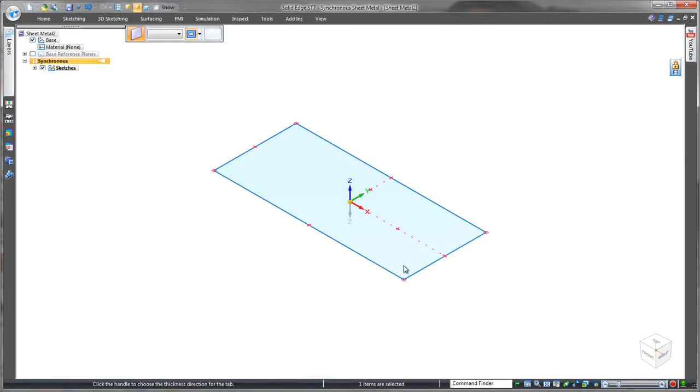Starting from a blank space, we'll sketch a rectangle roughly the size we want and pull that into a sheet metal gauge. For a couple of flanges at either end, we can simply pull these out too. Let's do the same thing again to add a couple more flanges.

And all the time, watch how we're working with our geometry rather than clicking through commands. Design is the focus here, not the software.

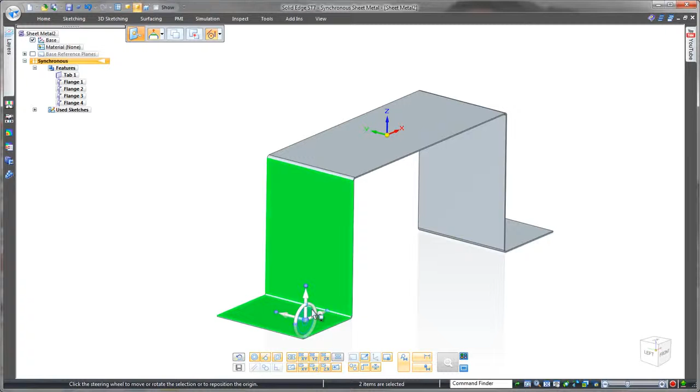Oh, and the design here should be for these flanges to angle out. No need for delete or undo. We can use what we call the steering wheel, our main control in synchronous technology, to angle. But not both sides, I don't think. No problem, we'll just tell these faces to be at right angles.

Just because we created these symmetrically doesn't mean there's history-based design intent tying us down, like you get in most any other CAD system. Easy.

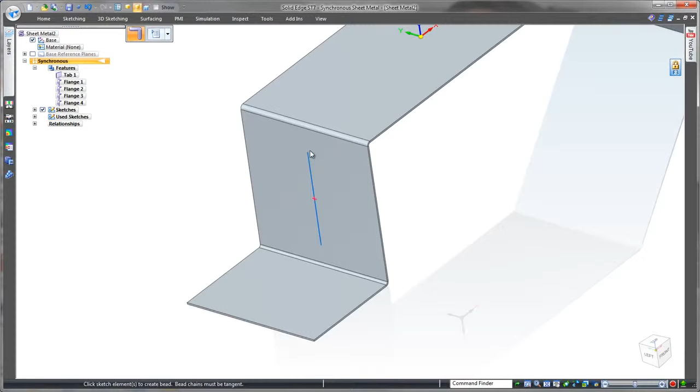Okay, next up we need a guide for the USB block that this spring clip will hold. A bead would be ideal, and that's as easy as sketching a line where we want it to be, and then choose the size and shape of our bead. This one I used in a previous project should work just fine.

Next, let's create a cutout to go through all three sections of the sheet metal on the right hand side. Oh, and check out this method as an even quicker way of sketching shapes.

Nice. We'll centre that up, and although this is a concept, I do know this needs to be 12mm in width, so we'll tie that down.

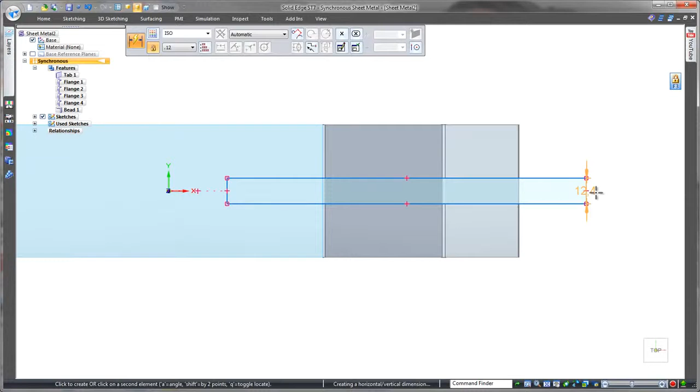Another simple drag, this time to remove material, but we want this cut to be created before the part is bent into shape. No problem, Solid Edge can flatten the part on the fly before cutting.

Very nice. For the retaining clip that we need, let's drag out a couple of flanges here and angle them both in. Same process as before, pull to create, and then the steering wheel to angle.

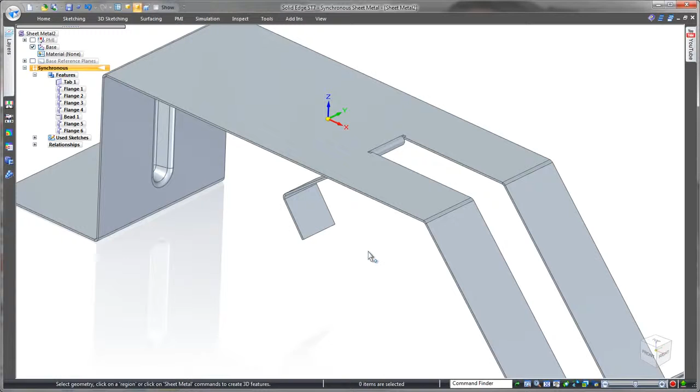We also need a sidewall to contain the connector block, so let's add another flange. But the material needs to be on the inside and a partial flange, not a full. Great!

Along with the USB block, this spring clip needs to clamp a fuse holder. We'll pull out another partial flange, and then let's mirror this across to the other side.

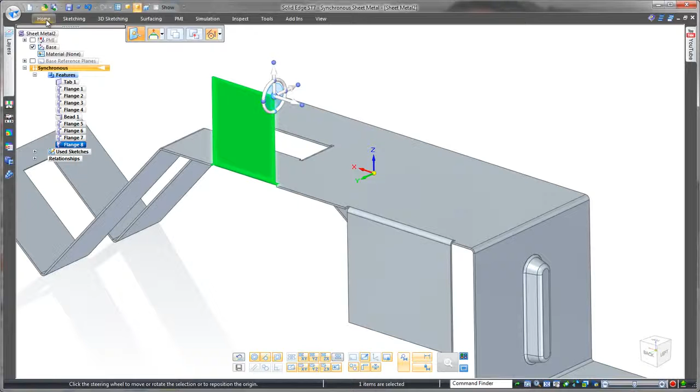Oh no, we've made a big mistake. The design brief clearly stated that this top sheet metal piece needs to be angled. I completely forgot. Remember that this was the first piece of geometry that we created.

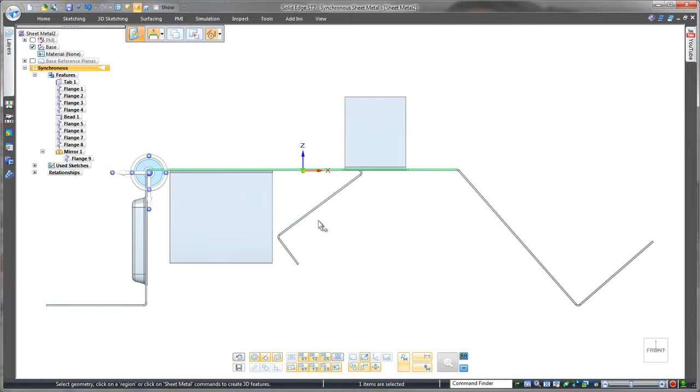Everything else is built on this. But also remember we're using Solid Edge with synchronous technology. Check this out. Steering wheel to the rescue, simple rotate, no drama.

Let's get back to working on the clamp for the fuse holder. Remember we mirrored this, and notice along with everything else, this has been added to a feature tree. Yes, it's direct modelling, but there are still features to work with, like in history-based CAD. The best of both worlds with synchronous technology.

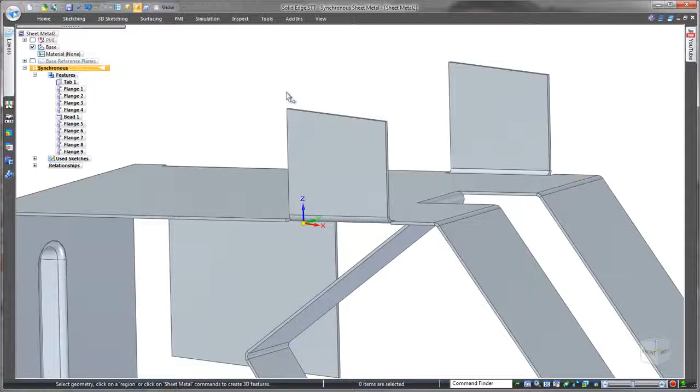That means we can edit the feature, breaking the link so that we can work independently on one side. And now we can add the jog that we want on this flange. Same process as the bead here, just a simple sketch line, and then apply the jog.

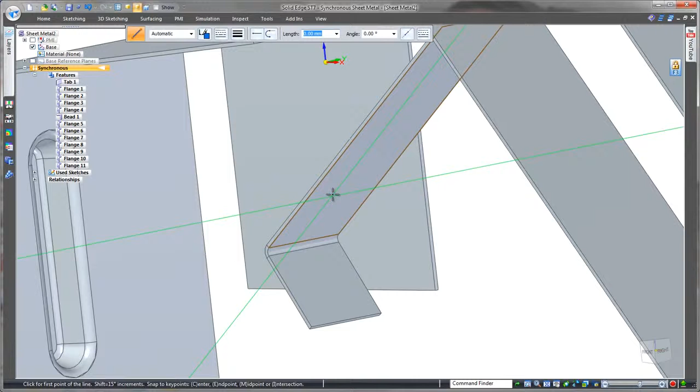Let's do the same for our retaining clip. Again, same process, simple sketch line where we want this jog to be, and then apply that jog, dragging it out into position. Easy.

Finishing up on our concept, let's get rid of some sharp edges by breaking corners. Nice and quick, click and go.

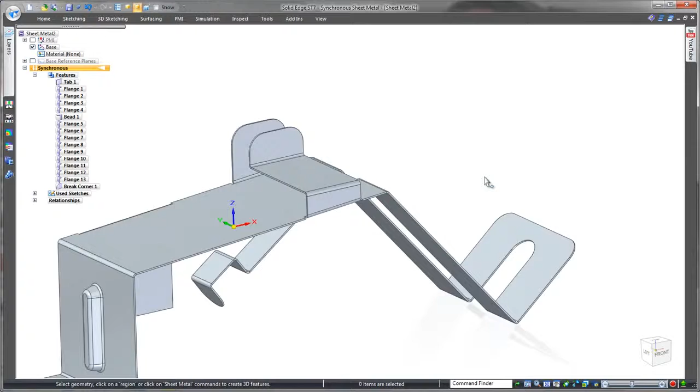And finally, we were briefed to include a hook to mount the whole spring clip. For this, let's push in the width of that second flange we created. And let me just repeat that, the second flange we created. No need to worry about the order that this was modelled, we're free to make this change.

And then let's use a hem to create the hook. Choose the right size, and done.

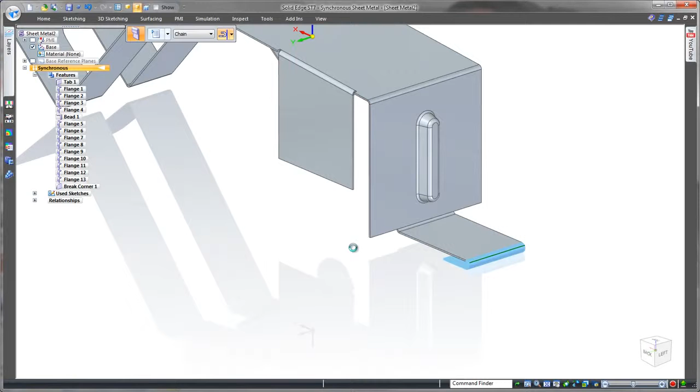So in a short amount of time, we were able to throw down this pretty complex design, working directly with the geometry rather than in and out of multiple CAD commands. And that's how it should be, no? Design the focus, not the software.

And you'll be happy to know that even if you don't create sheet metal components like we had here, you'll still enjoy the same rapid workflow. Minimal sketching, minimal mouse travel, easy push and pull modelling, and importantly, no need to worry about what order should I do this in. The flexibility to change your mind at any time.

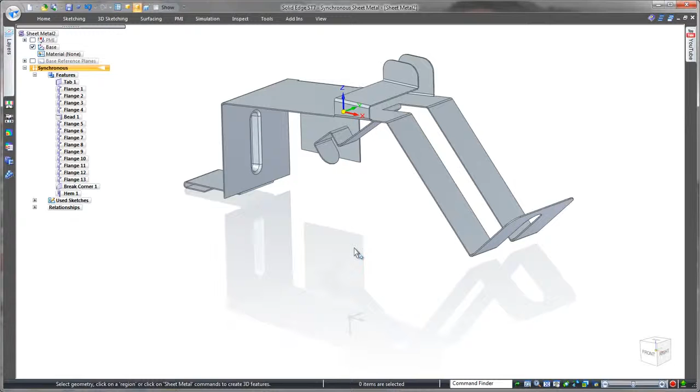That's synchronous technology in Solid Edge. Design better.